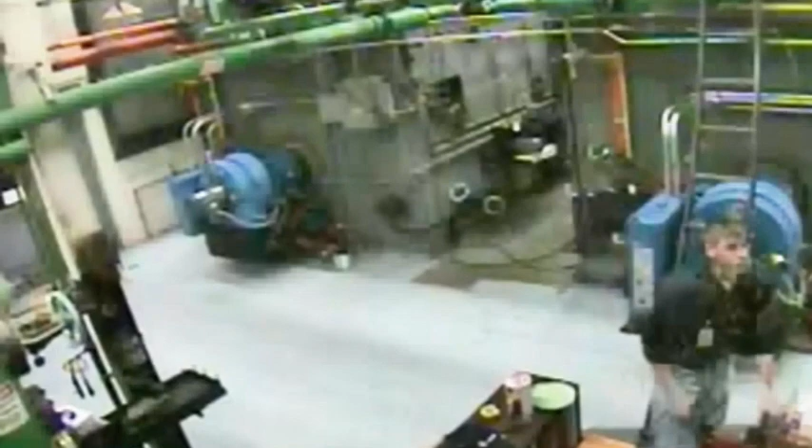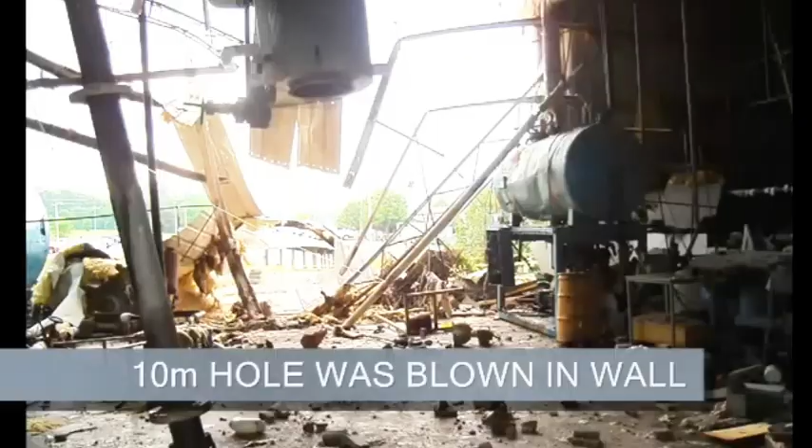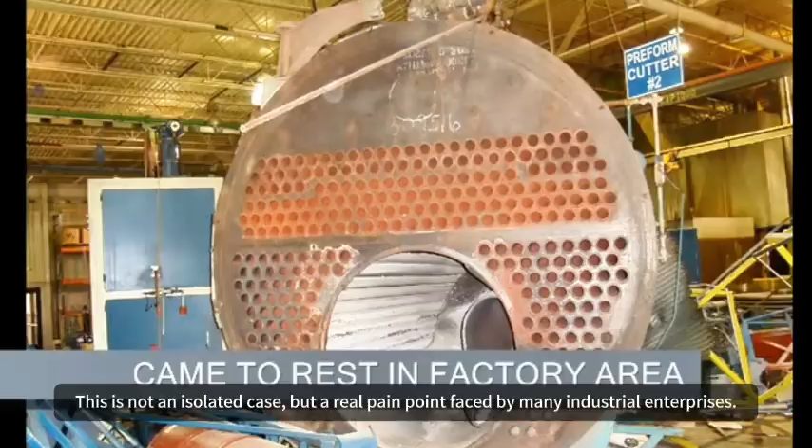Does your factory boiler's monthly fuel cost reach tens of thousands of yuan or even more? Frequent downtime for maintenance, and continuous fines for failing to meet emission standards. This is not an isolated case, but a real pain point faced by many industrial enterprises.

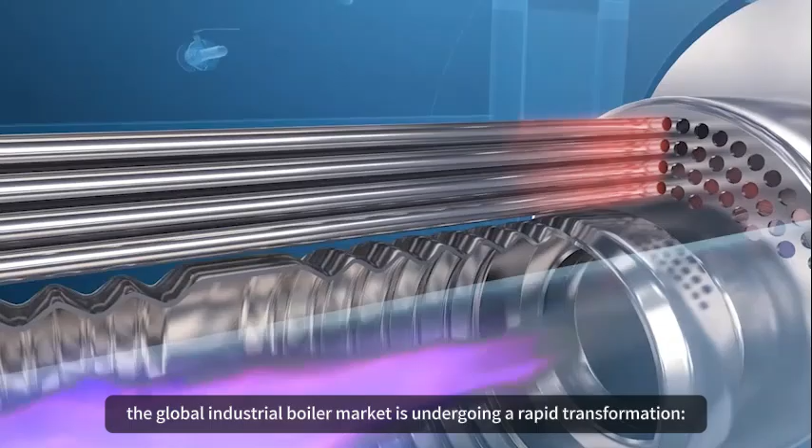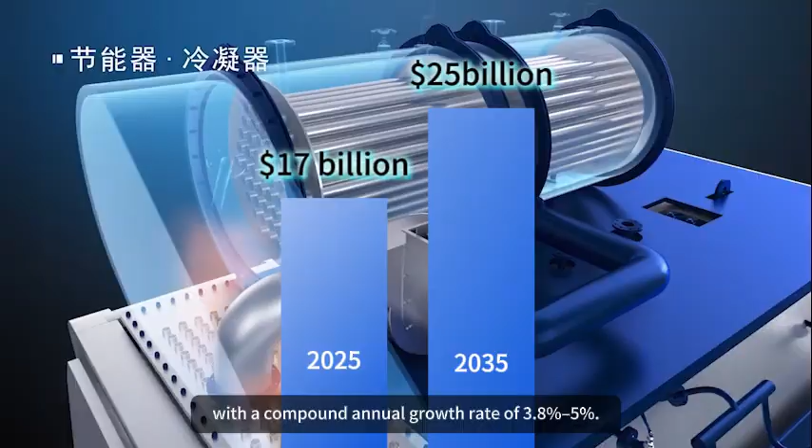The good news is that the global industrial boiler market is undergoing a rapid transformation. The market size exceeded $17 billion in 2025 and is projected to reach over $25 billion by 2035, with a compound annual growth rate of 3.8% to 5%. Demand for efficient, clean, and low-carbon boilers is experiencing explosive growth.

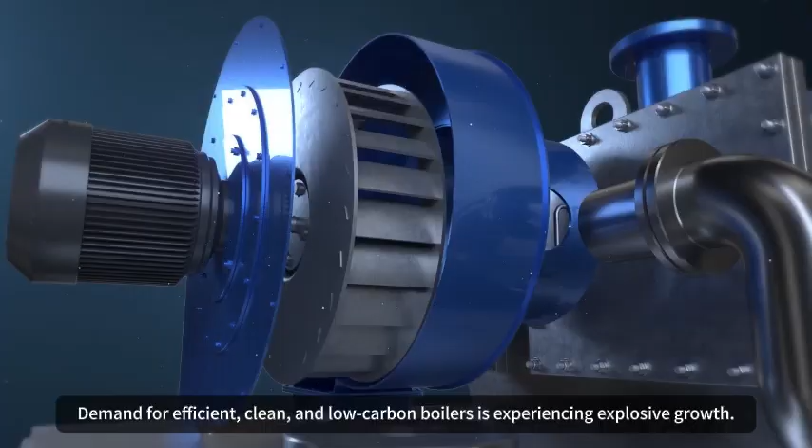Today, let's talk about how Fangkuai Boilers can help you solve these problems, achieving energy conservation, cost reduction, and green compliance. Let's get started.

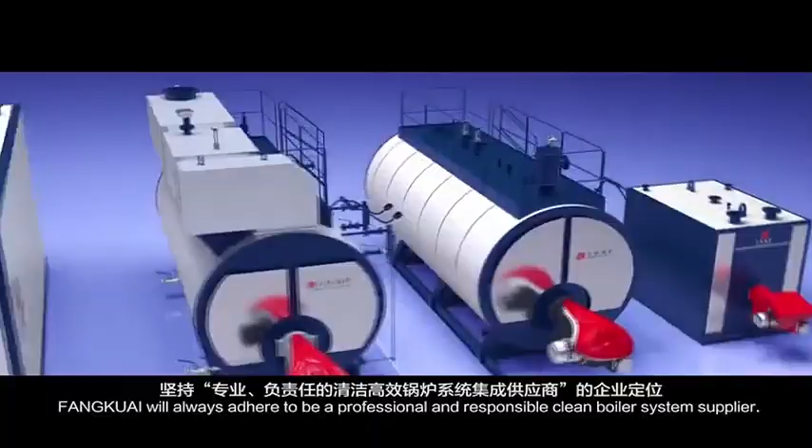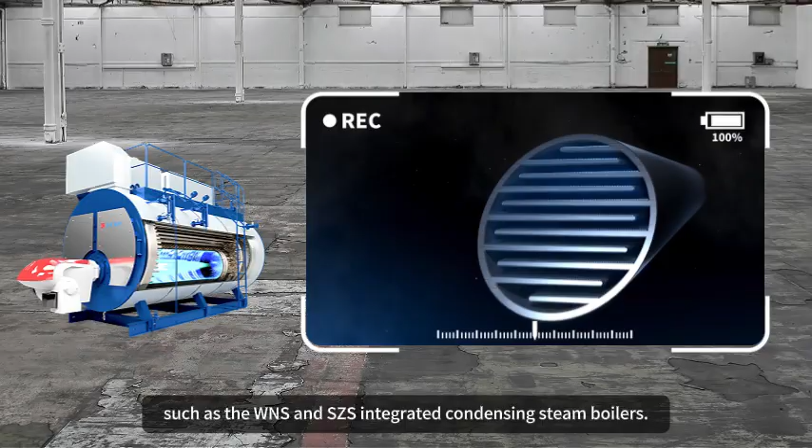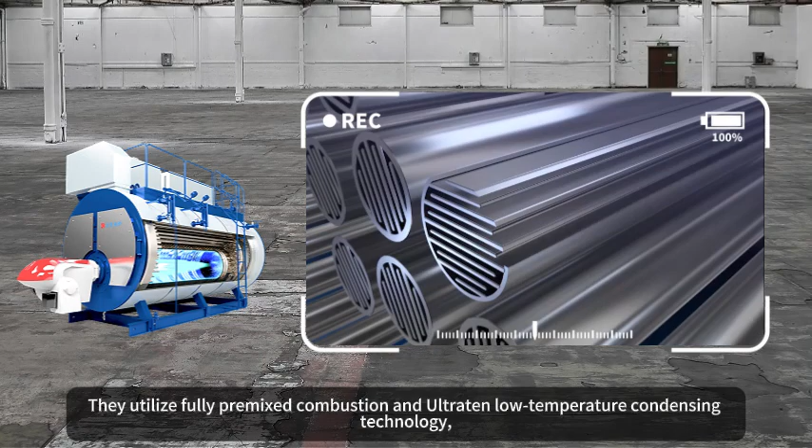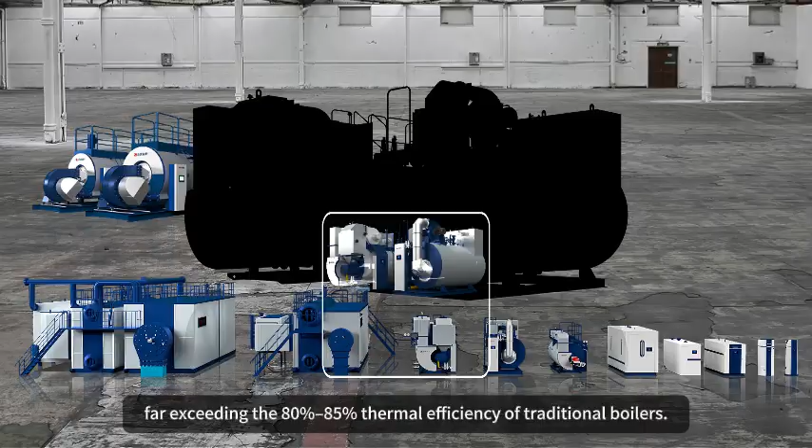First, let's look at our best-selling products. Oil and gas-fired steam boilers, such as the WNS and SZS integrated condensing steam boilers. They utilize fully premixed combustion and ultra-low-temperature condensing technology, achieving a thermal efficiency of up to 98% to 99%, far exceeding the 80% to 85% thermal efficiency of traditional boilers. This means you can save 20% to 30% on fuel costs annually, while nitrogen oxide emissions are as low as below 30 mg/m³, easily meeting the most stringent environmental standards.

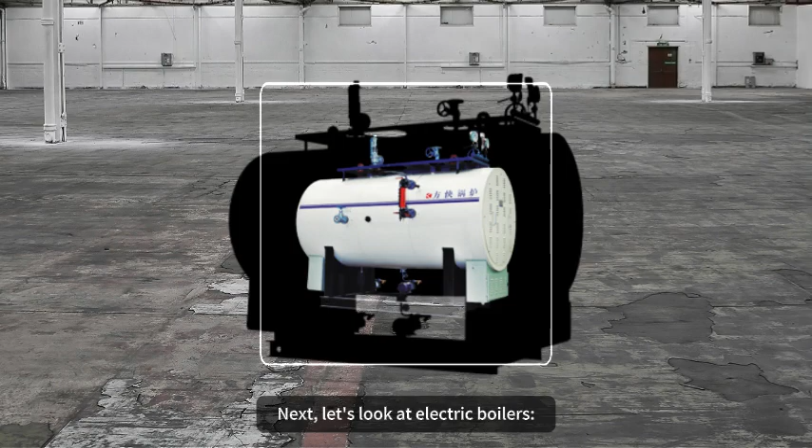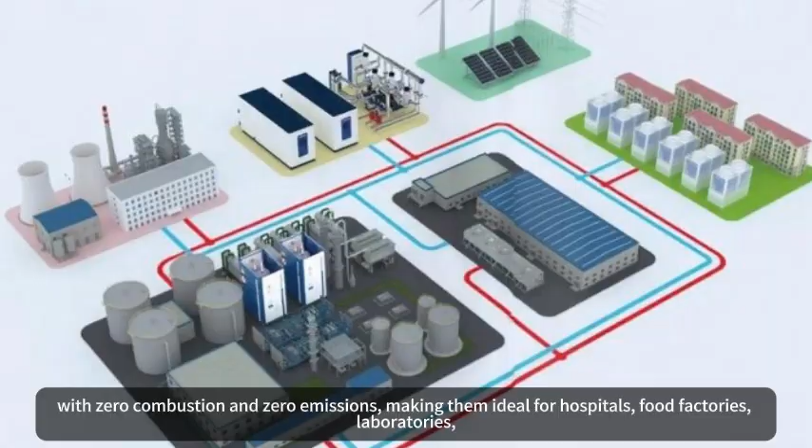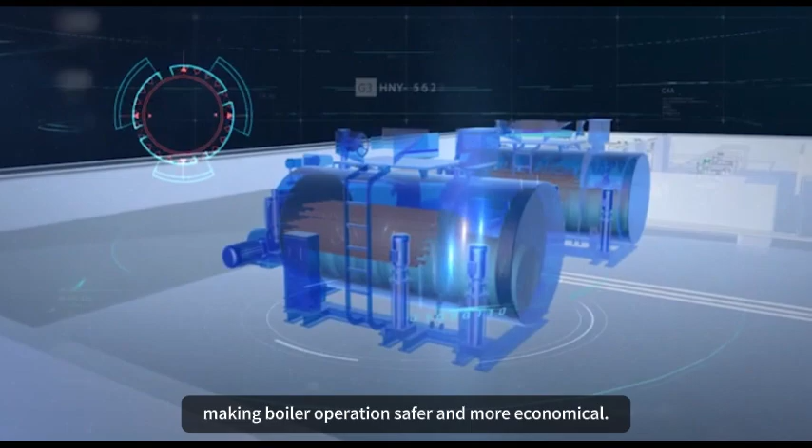Next, let's look at electric boilers. Their thermal efficiency is close to 100%, with zero combustion and zero emissions, making them ideal for hospitals, food factories, laboratories, and other places with extremely high cleanliness requirements. All products are equipped with PLC intelligent control and the Cloud Service 4.0 system, remote monitoring, fault early warning, and big data analysis, making boiler operations safer and more economical.

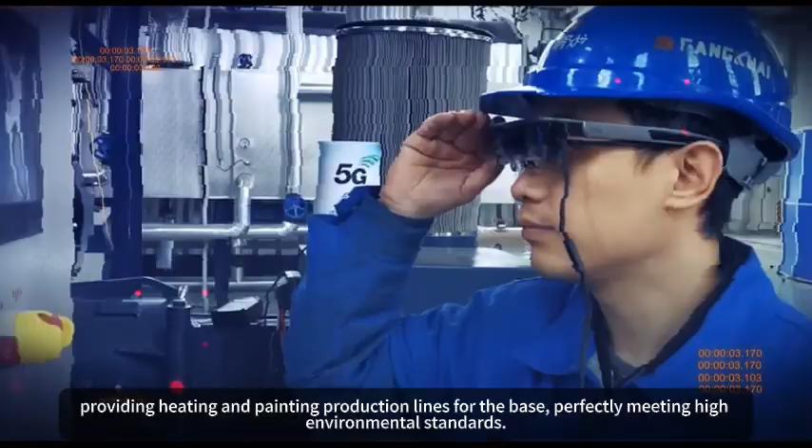Fangkuai Boilers has served multiple markets globally, especially in Europe, where we have obtained EU-CE certification and successfully won the bid for BYD's European New Energy Vehicle base project, providing heating and painting production lines for the base, perfectly meeting high environmental standards.

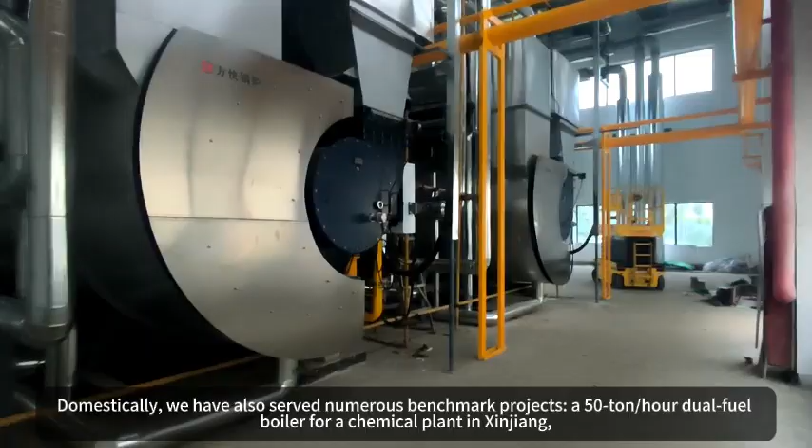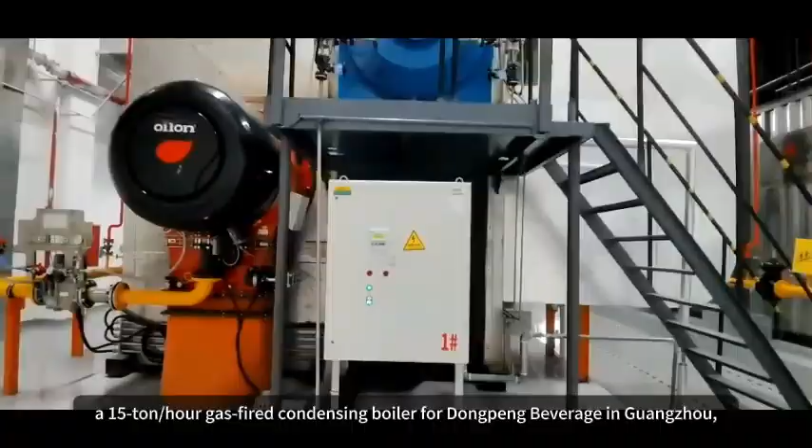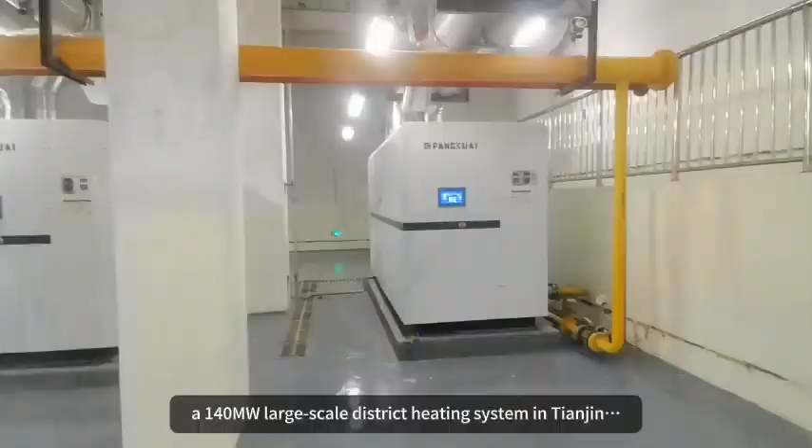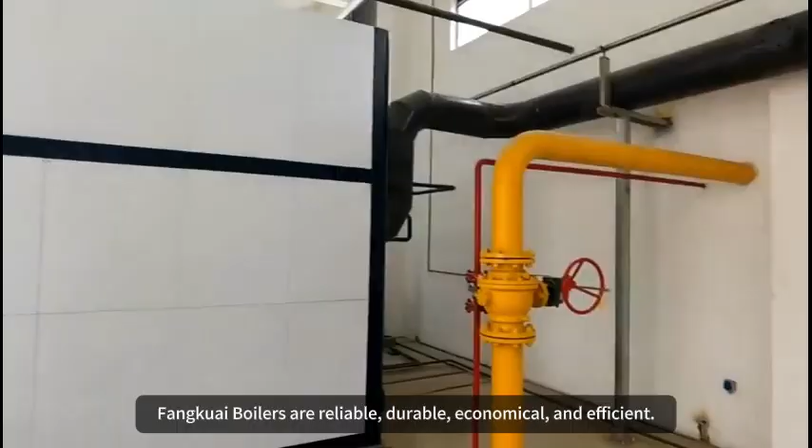Domestically, we have also served numerous benchmark projects: a 50-ton-hour dual fuel boiler for a chemical plant in Xinjiang, a 15-ton-hour gas-fired condensing boiler for Dongpeng Beverage in Guangzhou, and a 140-megawatt large-scale district heating system in Tianjin. These projects fully demonstrate that Fangkuai boilers are reliable, durable, economical, and efficient.